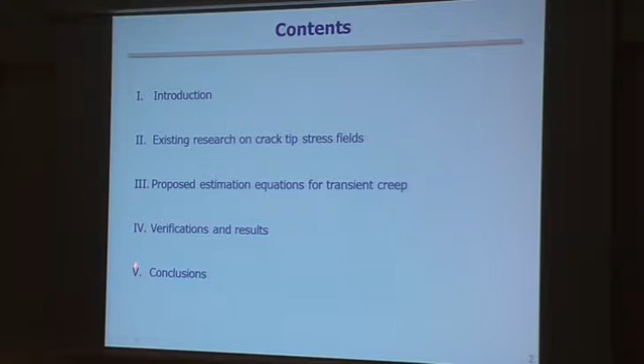As you know, for plant structures under high temperature operating conditions, it is important to consider creep behavior. Existing nuclear plants operate under high temperature and high pressure. This condition causes steady-state creep. But Generation 4 nuclear plants, for example SFR, operate under high temperature and low pressure. This condition causes transient creep during operation.

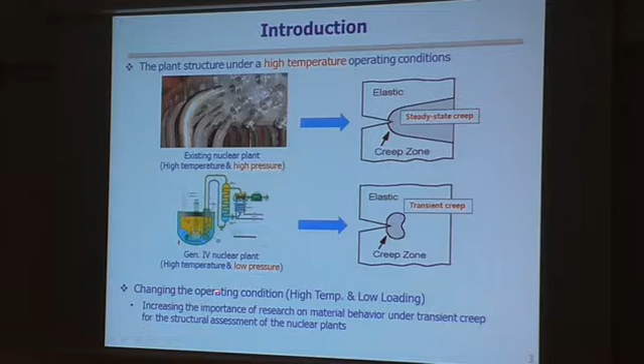So the importance of research on material behavior in transient creep for the structural assessment of nuclear plants is increasing. So I started study on transient creep behavior.

I will briefly introduce crack-tip stress field estimation. In linear elastic fracture mechanics, an equation using the stress intensity factor K and T-stress is proposed. In elastic-plastic fracture mechanics, the HRR field and Q-stress are proposed to estimate the crack-tip stress field. And in time-dependent fracture mechanics, the RR field is defined from C*, and Q-stress is proposed. But this equation is applied under steady-state creep.

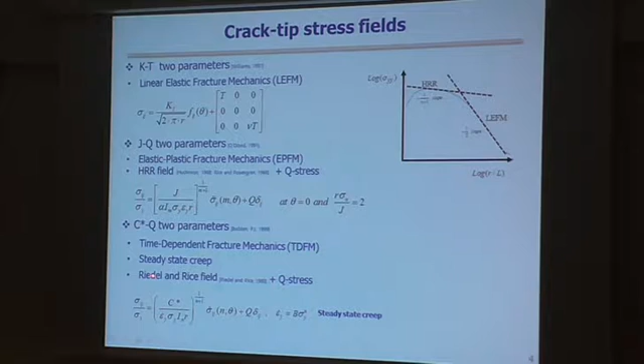Then, to estimate the crack-tip stress field in transient creep, the Ct integral is used, and in this equation the RR field is defined with the Ct integral. But this equation cannot consider the constraint effect. Then, using the reference stress, a beta-Q term is proposed to estimate the crack-tip stress field considering the constraint effect. And this is the method's equation.

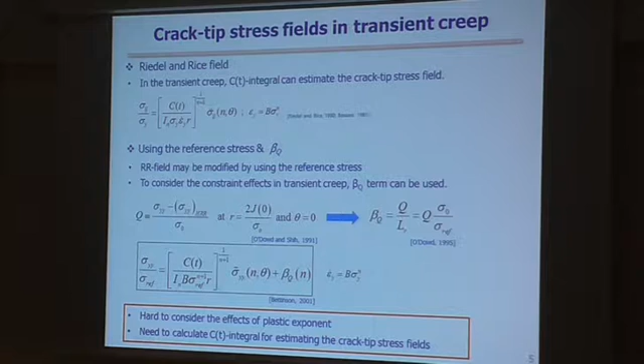But this is hard to consider the effect of plastic exponent, and it needs to calculate the Ct integral for estimating the crack-tip stress field. Now, firstly, I checked the existing estimation equation by comparing with FE analysis. And from the comparison results, I analyzed the applicable and improvable points of the estimation equation.

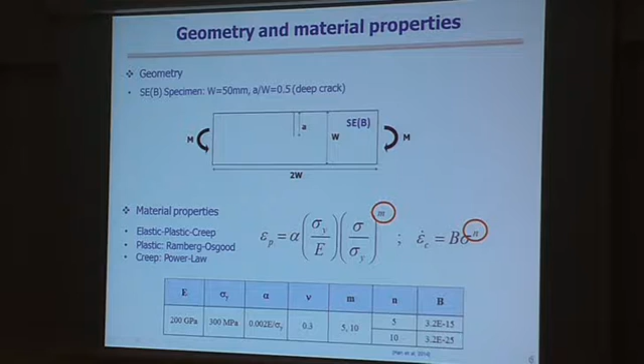I consider an SEB specimen in this FE analysis. As material property, elastic-plastic is applied; for plastic behavior, the Ramberg-Osgood equation is used, and for creep behavior, Norton's law is applied. This table shows the detailed information. I will talk about FE modeling and analysis.

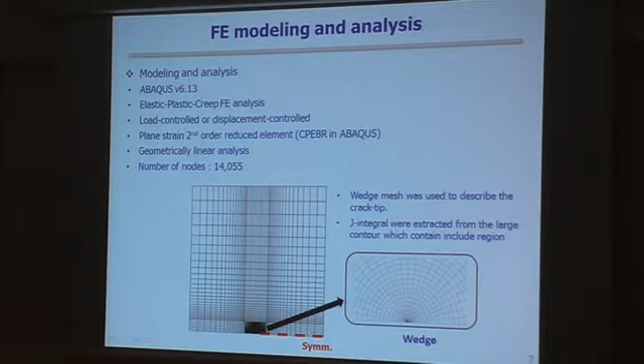Elastic-plastic FE analysis is performed using Abaqus. As loading condition, load control or displacement control are each applied. This figure shows the used FE model and boundary condition. Wedge meshing was used to describe the crack tip.

For validation of the FE mesh to calculate the Ct integral, elastic creep FE analysis is performed. At short time, the value of the Ct integral should satisfy this relationship. From the definition of the Ct integral, the values of Ct were extracted from the second contour. This figure shows the FE mesh used in the present work can provide accurate Ct integral values.

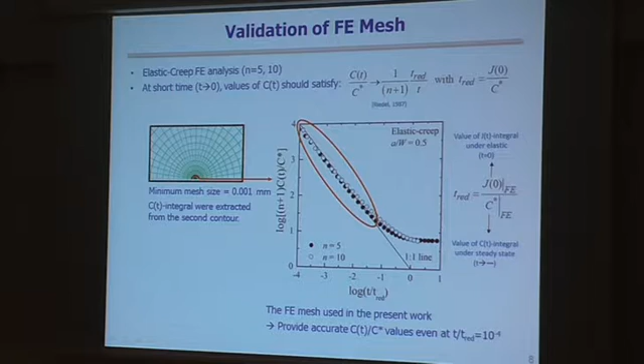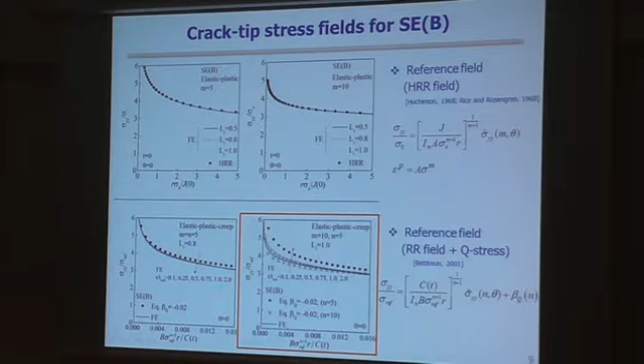And we use this equation. For using this equation, we calculate CT from the FE analysis. But for a more simple method, the CT estimation equation is checked. For validity of CT estimation, we compared the FE result with existing CT estimation.

Upper part is for load control cases, and bottom part is for displacement control case. This figure shows existing CT estimation has limitation when m unequal n case.

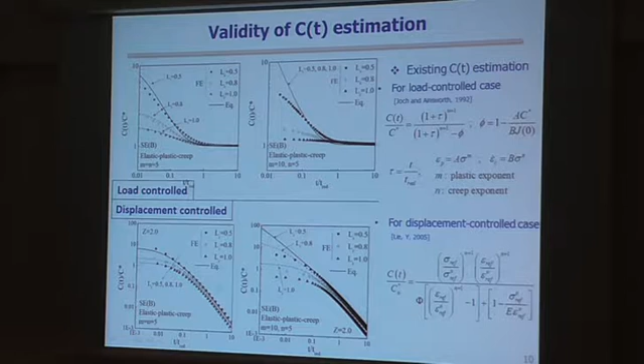Objective. Existing equation for estimating crack-tip stress field has some limitation. So in this paper, to improve the limitation, I propose equations to characterize the crack-tip stress field under transient creep using a modification of the existing equations.

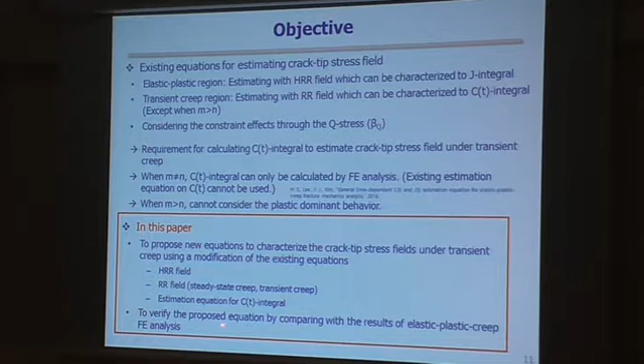Using equation is HRR field, RR field, and estimation equation for CT integral. To verify the proposed equation, I compared with the results of FE analysis.

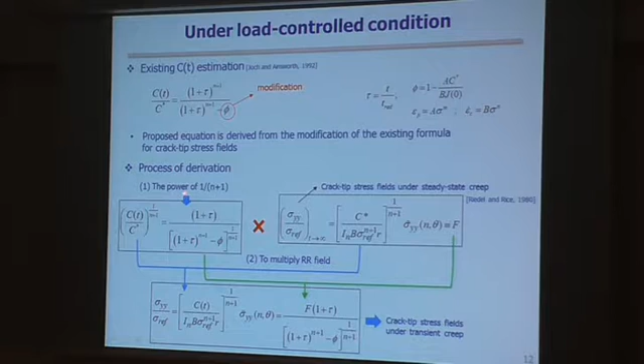This slide and next slide show the process of derivation of the proposed equation under load control case. Proposed equation is derived from the modification of the existing formula for crack-tip stress field. This content is modification, and the derivation process is as follows. In the derivation, I assume that the equation equals HRR field at initial time.

And finally, I propose this equation. This equation has a limitation for m equal 10 and n equal 5 and larger loading amplitude. For this condition we propose a fitting equation using FE analysis.

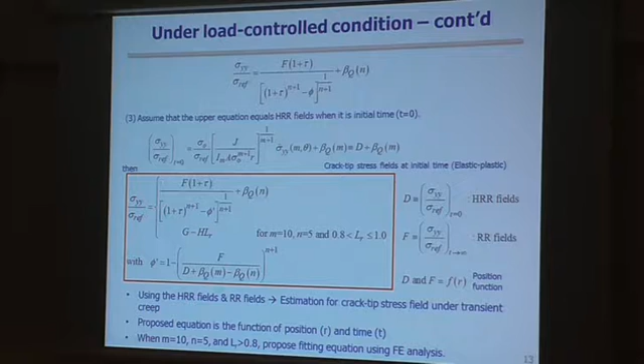This slide shows the proposed equation for crack-tip stress field under displacement control. The process of derivation under displacement control is similar to the process under load control condition. And final proposed equation is this. This is also a modification of existing CT estimation.

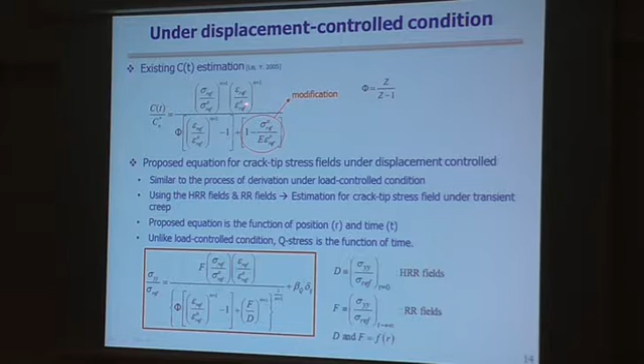Before comparison of proposed equation with FE analysis, I estimate Z factor. Z factor is elastic follow-up factor, and this factor is needed to characterize secondary stress loading condition.

And in this paper, I define Z factor by comparing FE results with the existing equation of CT integral under secondary loading condition. And this figure and this table show the determined Z factor.

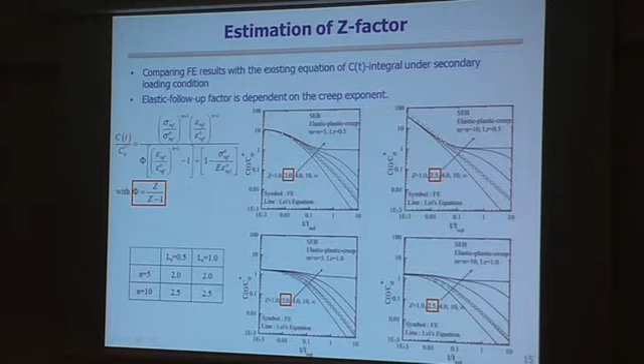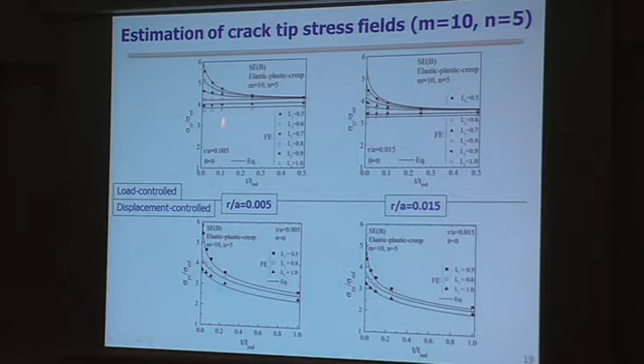And in this case, M equal 10 and N equal 5. In displacement control case, it is good agreement. And in load control case, as I set the limitation before, in small loading condition the proposed equation is in good agreement, and for this large loading condition we proposed a fitting equation from this FE analysis.

Conclusion: I checked the existing equation of crack-tip stress field, and I propose the equation to characterize crack-tip stress field under elastic-plastic-creep conditions using a modification of the existing equations. For verifying the proposed equation, I performed 2D FE analysis for SEB specimen, and we checked that the proposed equation can characterize the crack-tip stress field.

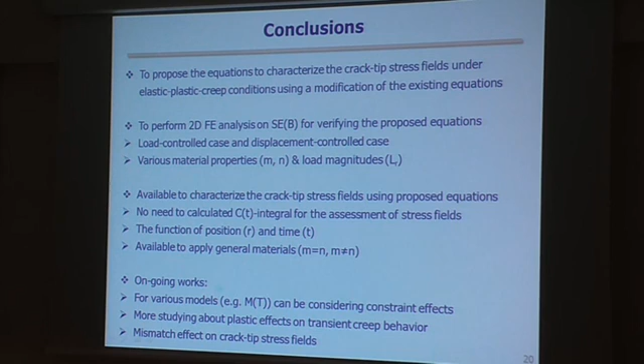And for ongoing works, various models can be considered to consider the various constraint effects. And we will have more study about plastic effects on transient creep behavior. And another research, mismatch effect on crack-tip stress field, will be studied. Thank you.